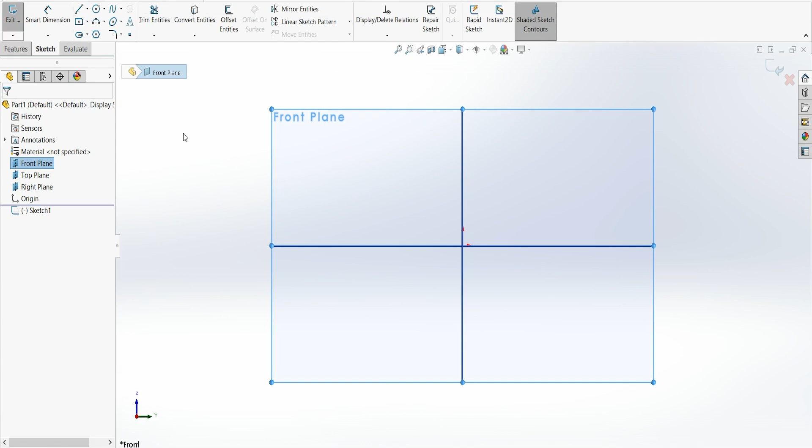Make the planes visible. Go for the front plane, sketch, go for a center rectangle, place it in the center, and give some dimension there using smart dimension, length and width.

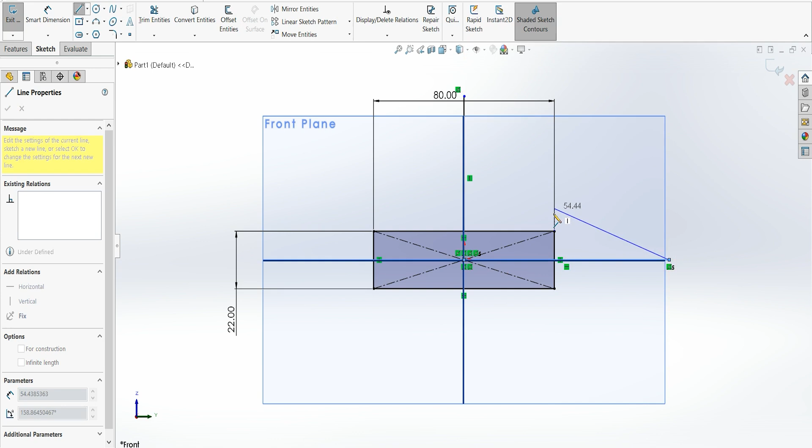Now we'll change the dimension slightly. Go for line and we will divide the rectangle into a quadrant so that we can do a revolve later. So I drew two lines, one vertical and horizontal.

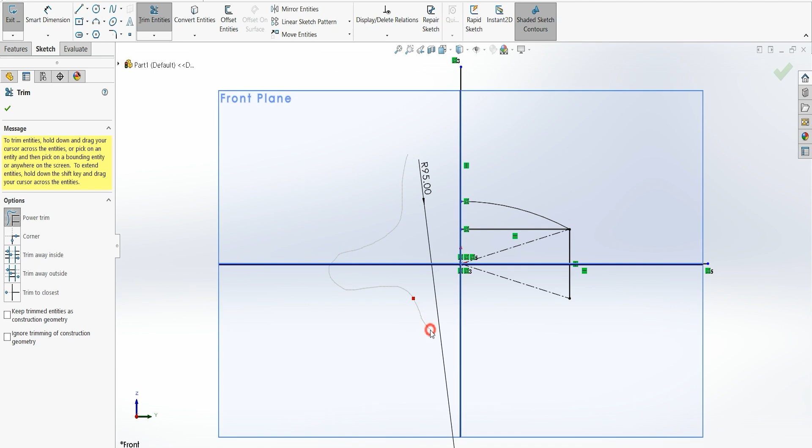Go for a 3-point arc and we'll create a small dome there. Give some dimension there, R95. Then trim, and we'll trim every section leaving the right half so that revolve works proper.

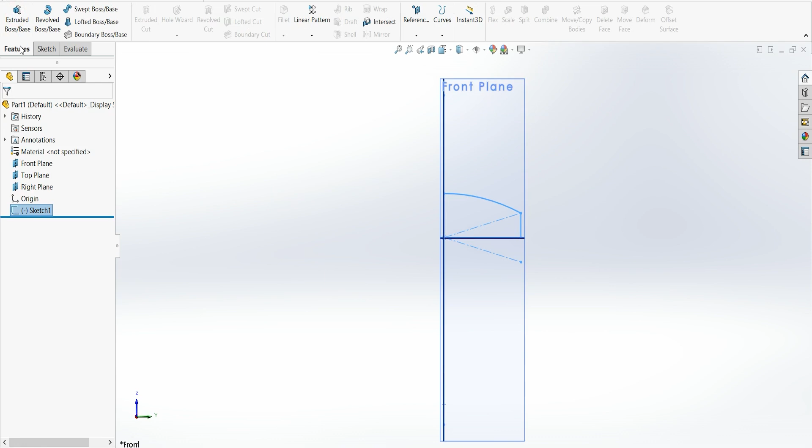And we'll add a center line there for the axis. Done. Now go for exit sketch, features, revolve boss, and select the axis, and we got our lower portion of our regulator knob.

Now we'll create a plane using reference geometry and create an offset plane at a distance.

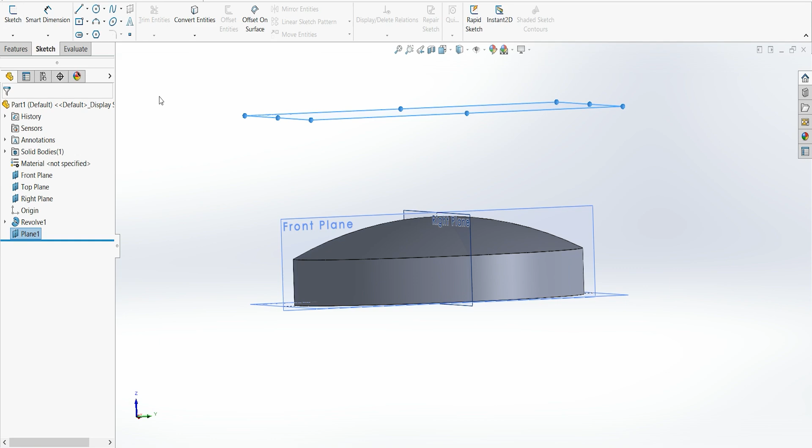This is for the grip. This plane is created for the grip, but before that we'll just do a shell on the bottom to create a hollow portion there. Give some thickness and click on OK.

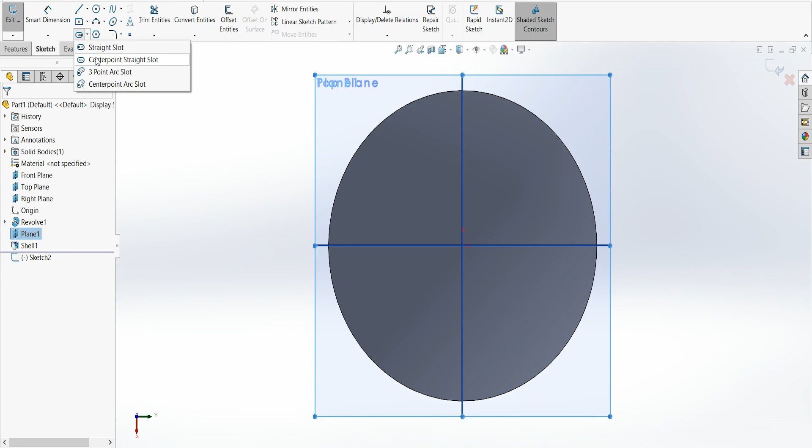Done. Now going for the grip area. Select the created plane, go for sketch, create a center point straight slot, and give a proper dimension there, adjusting the size proper.

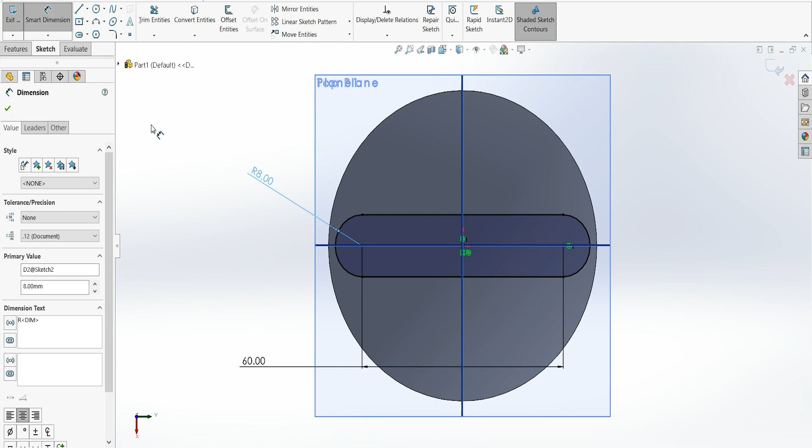Smart dimension, radius. Exit, go for boss, reverse direction, up to next. Now we've got a grip there.

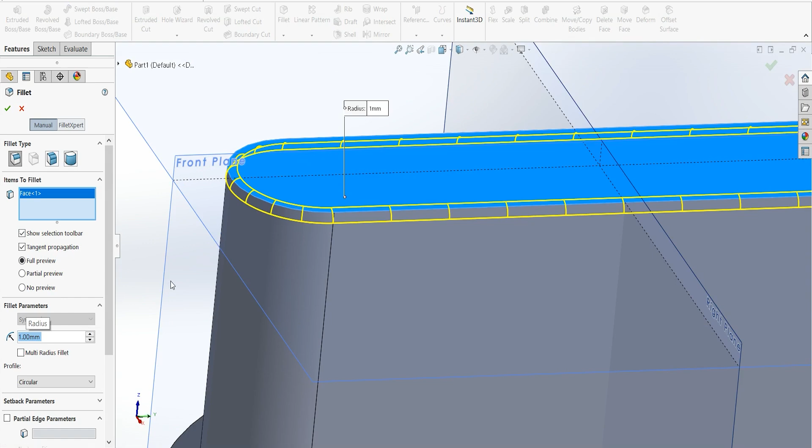Now applying some fillet to the top to remove the sharp edges. Done, click on OK. Now we will go for the front plane sketch and create a small pointer there, a triangular pointer.

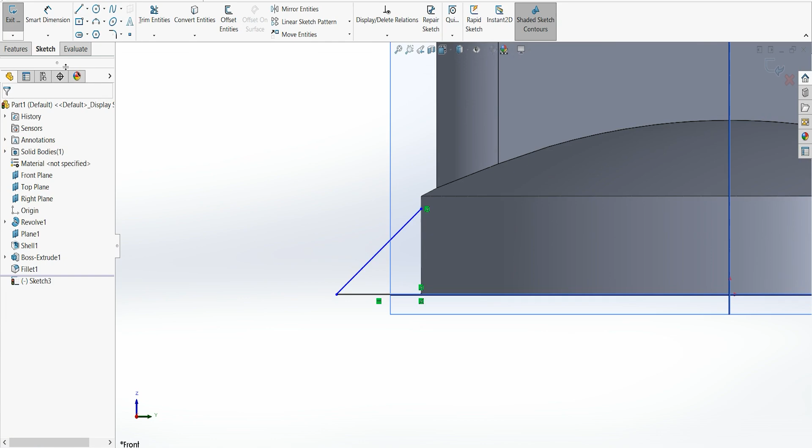Keep the sketch open so that we can use the rib option. So one side of the triangle remains open, rib, and reverse the direction. Give some thickness there and click on OK. Done. So we have got a pointer there.

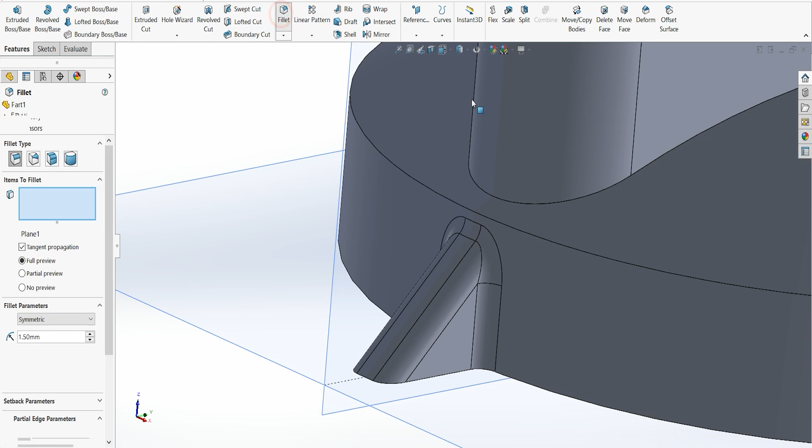Now go for fillet and apply some roundness to the sharp edges. A little bit more fillet to other edges. And then for the grip area, fillet. Now one more edge.

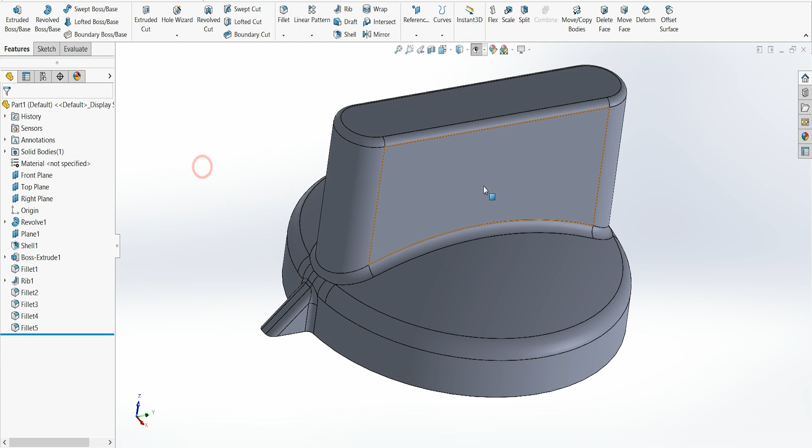So the outer portion of the knob is almost done. Now I'll apply fillet to the lower edges to remove the sharp edges. Some minute fillet there, because already the thickness is smaller on that area, so give a slight thickness for the fillet.

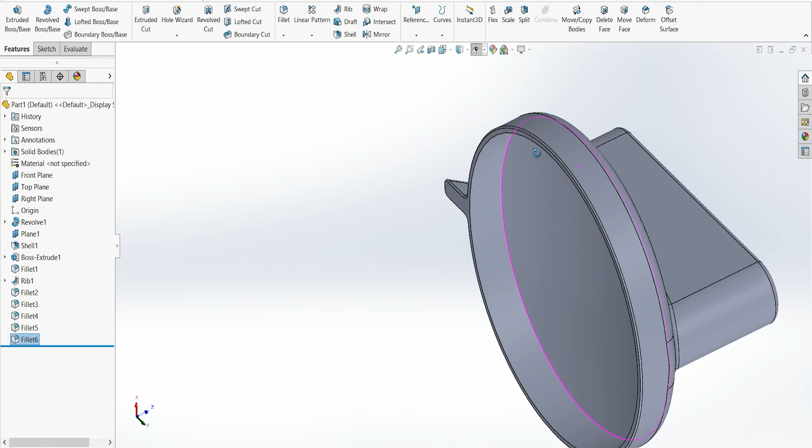So done. Now we'll go for reference plane and create a plane, reverse direction, inward direction, at a very small distance, and click OK.

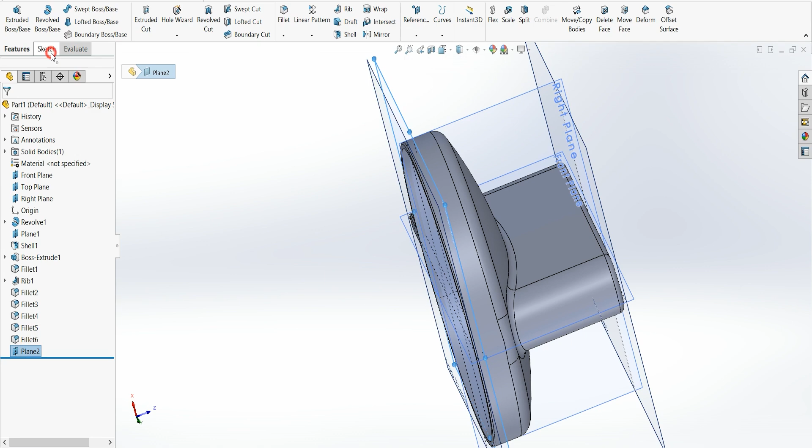This is the plane created for the inner keyway area so that the knob can be fitted on the board wherever the switch is present. So go for a circle.

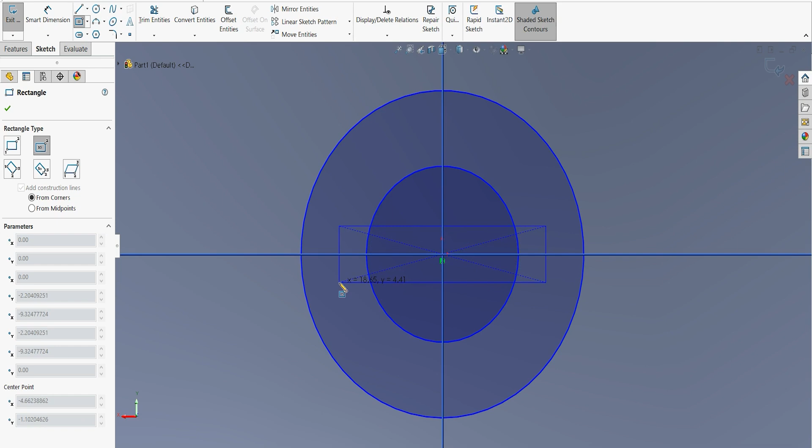Adjust the sizes and give a rectangle there, center rectangle, for creating the keyway like shape. Trim it. So our middle portion is ready.

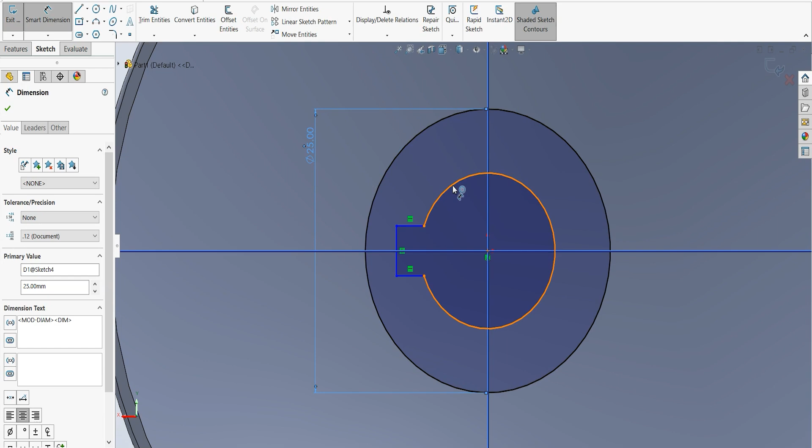Now just adjust the dimensions, give smart dimension there, verify. Done.

Exit and go for extrude, reverse, and up to the next. So we have our middle part ready.

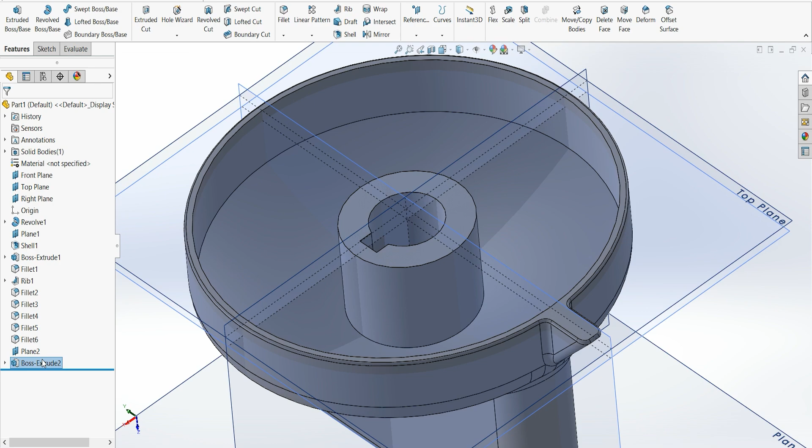Now we'll create supports. Select the top face, the same face we created, and go for sketch. Now we'll create an open line again for using the rib command. So we have an open line there.

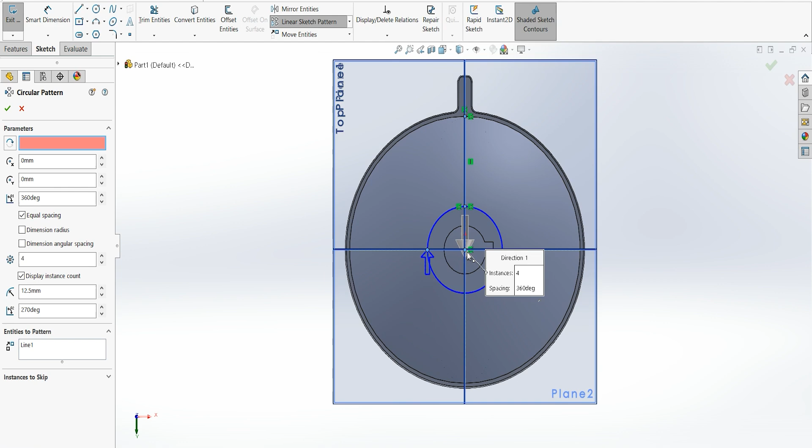Now we need a circular sketch pattern. Select the object, go for circular sketch pattern, and we can give number of items 3. Now select the points. Sometimes the point does not select, so we can also select the edge.

Okay, we can select the edge. Sometimes it is difficult to select the point, so you can also select the edge. So you can see you got your line pattern. So apply the number of items and click on OK.

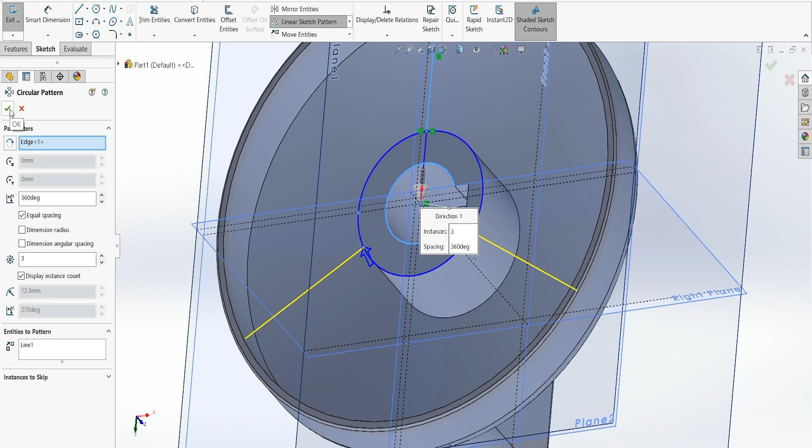Done. Now go for exit, rib, and you can apply your required thickness and click on OK. Done. So the inner boss area is done.

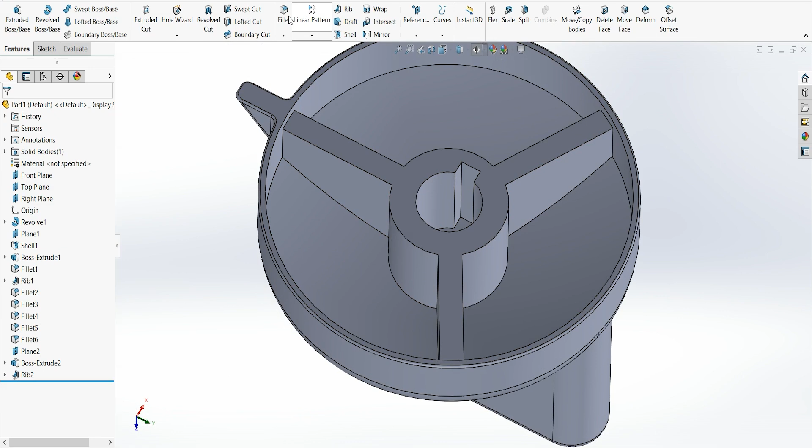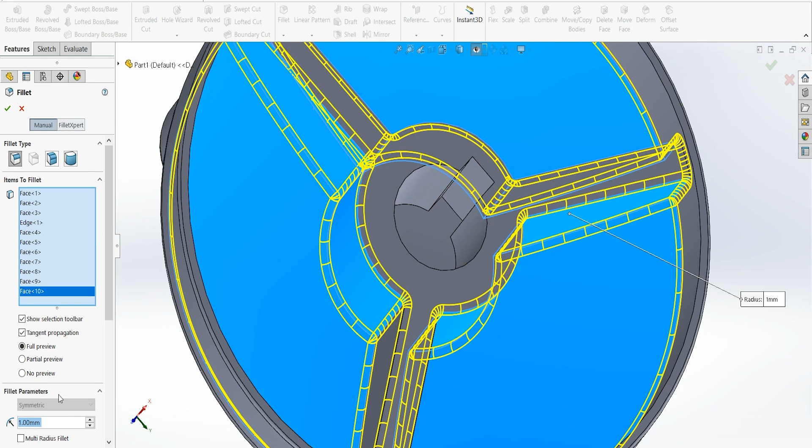Now hide the planes and go for fillet to apply rounded edges to the inside faces. And once done, click on OK.

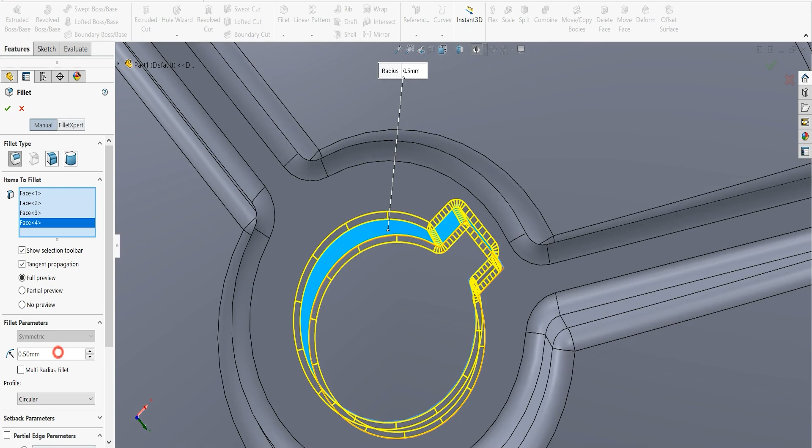Done. Now we'll apply some fillet to the inner area as well to give some roundness to the edges. A very small fillet there. Once OK, then click on OK. Done.

Now we have here the regulator knob design ready. Now you can change the visibility to smooth edges and we can see the knob proper. And change the visibility to sharp edges.

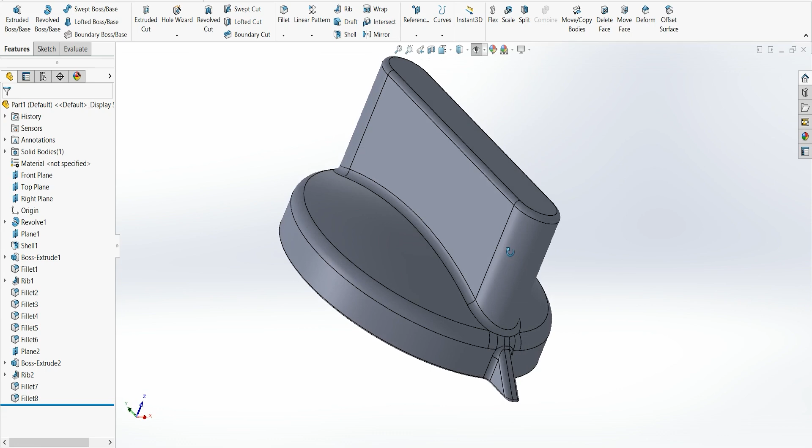The edge is visible. Now select the top face, go for sketch, and we will create a small circle there for indicating the pointer side. We'll create a small dent, exit, extrude cut.

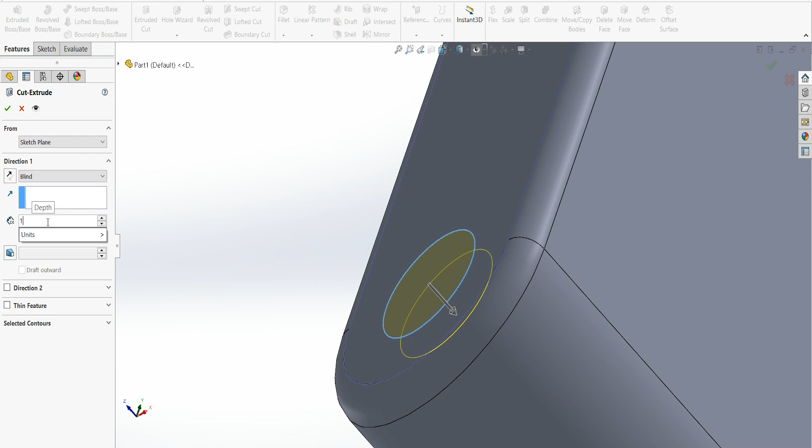So we have our small indicator there, a small dent to indicate the pointer location.

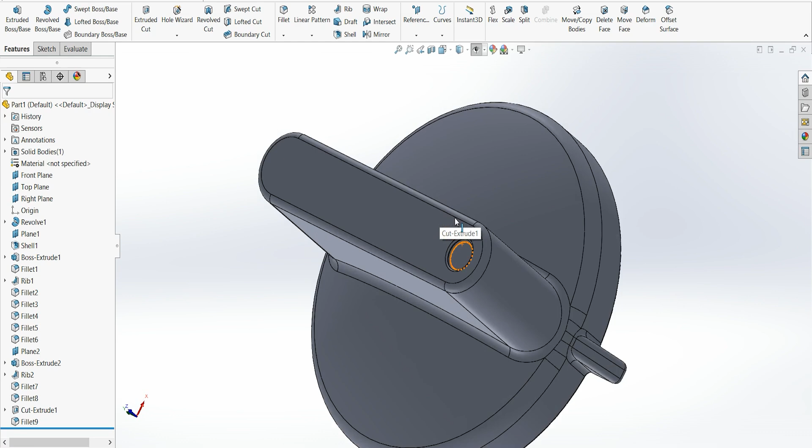That's your regulator knob design. You can see from all sides all features are proper. If any edges are left out, you can apply fillet and smooth it.